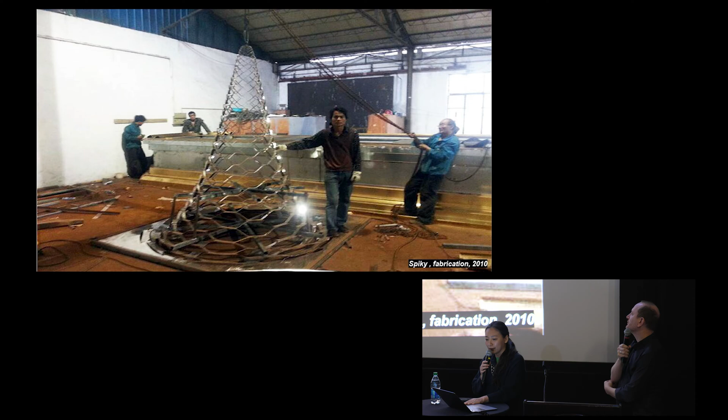For example, a piece of stainless steel can be water jet cut into thin stretches, so that when we pull them together—much like paper—they become three-dimensional and form an interesting pavilion. But they can also be squished down, flat-packed, and shipped to other places. So there's this sense of mobility and transformability that we're very interested in exploring in a real material sense.

Another concept that's been important to us from the beginning is that architecture doesn't have to be one-directional, just expressing its own intentionality outward. There's also the engagement of the user, the histories that are already there, the cultural perspective that's already there, and the experience every visitor brings to a place or object—what they carry with them before they encounter that object in the space—which is also part of the experience and part of the conceptualization of what that space is.

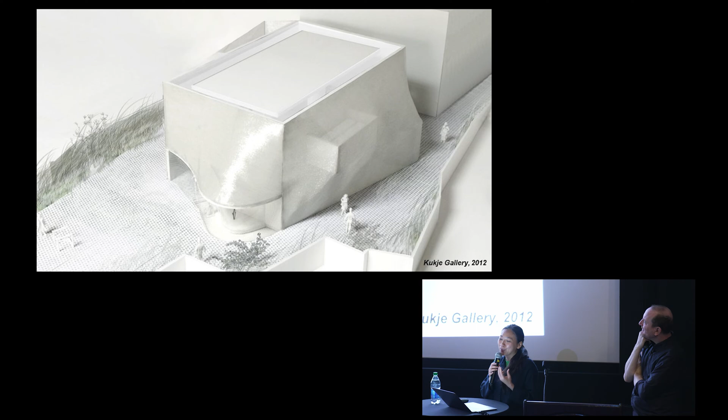This idea of interaction and perception is very interesting for us. How does that get experimented with in architectural terms? We often experiment with forms that are not strictly opaque or transparent, but somewhere in between, forms that are dynamic rather than static, and transformative. It's just one moment in a long series of times. The sense of engagement, in whatever form, is welcomed, as is breaking down what permanence can mean at small everyday scales, both in how things get constructed and fabricated.

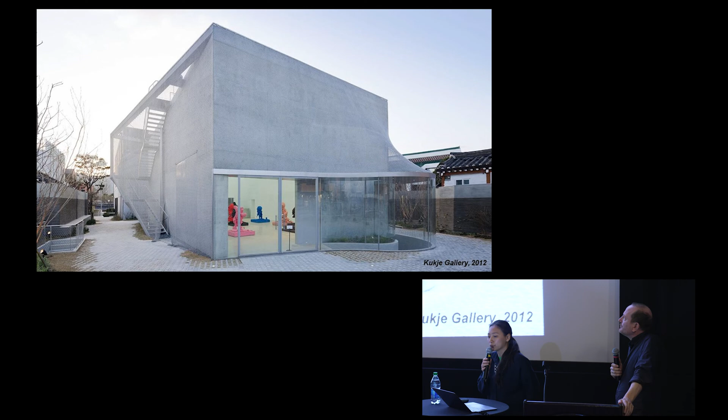For example, this was one of our earlier projects: a gallery building in Seoul, in one of the oldest neighborhoods, right across from the Imperial Palace. We knew from the clients that the neighborhood was upset about large contemporary art buildings moving into this historically sensitive context, because many of these buildings are abstract box-shaped modernist forms that clash with the refined, complex textures and geometries of the old Hanok homes surrounding the site.

What we proposed, which was immediately accepted by the Historical Society, was a bespoke handmade cloth that we wrapped the building with, letting accessory elements like the staircase to the roof or vestibules take on more playful, engaging forms around the big gallery box, cloaking it with this soft cloth. It's made of 500,000 stainless steel rings hand-welded together. As a result, the form doesn't seem drawn by a master or fixed permanently—it's always changing, with a soft, double-curved form that can only be made by hand.

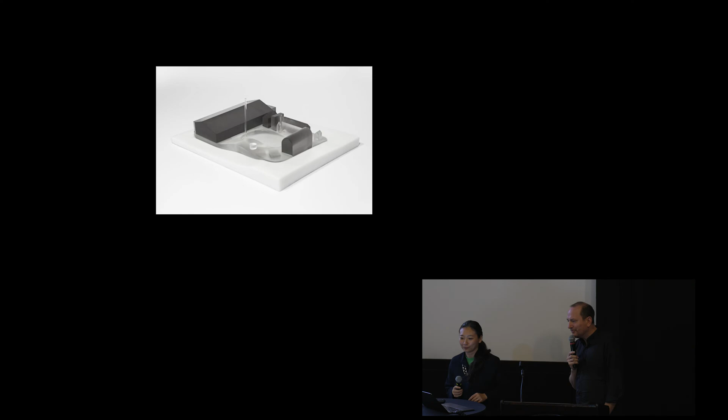Two of them are arts projects, and two are housing projects. As Jing mentioned, a lot of the early experiments around material, time, form, site, and labor informed these four projects. Jing and I, coming from a bunch of different places and having lived in many different places, are very much drawn to site—the history of a place, its particularity, really informs how we approach these projects.

There are four projects: two in the US and two elsewhere. This one is in northern France, in a very small town called Meisenthal. That sounds German—it's on the border between France and Germany. Sometimes it was actually part of Germany, sometimes part of France. Right now it's part of France, but they still prefer to speak German. It's a region where the European tradition of glassmaking emerged. There are other sites, obviously Venice, but this area is famous for its very ancient, early creation of glass. This town was the site of a glass factory.

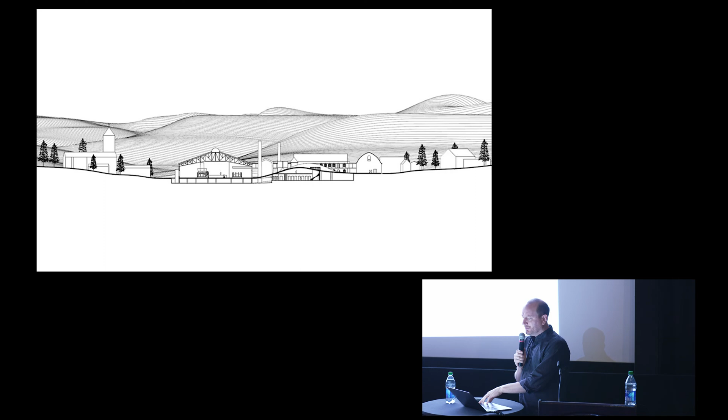We started to think about this ground as a molten ground, similar to the way we turn glass from liquid into solid. How can we think of this ground as something with a certain fluidity, using it as an organizational element that could bring these three disparate organizations together on a common ground?

So rather than making a building, we proposed more of a landscape intervention, to also bring back the factory yard as the center of the town.

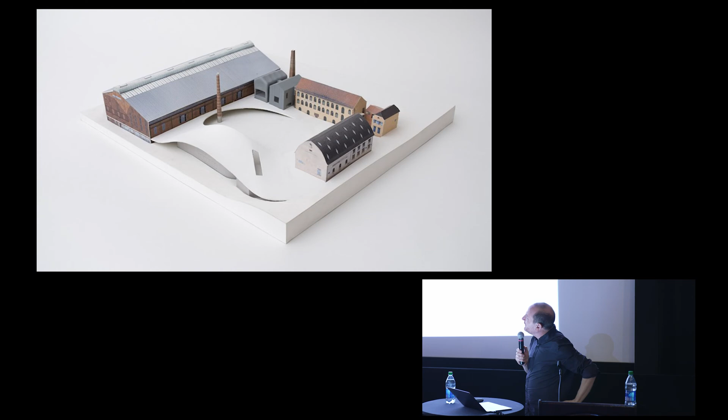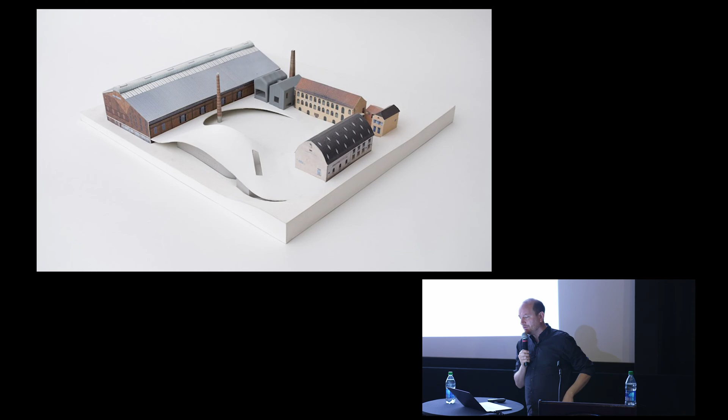We introduced this almost like a picnic blanket in French, a nappe, on which these buildings could sit as a common ground, then lifting it, creating over this ruin a new entrance. So the entrance to the site is now under this picnic blanket, into the old center courtyard, where the three different organizations share a common ground.

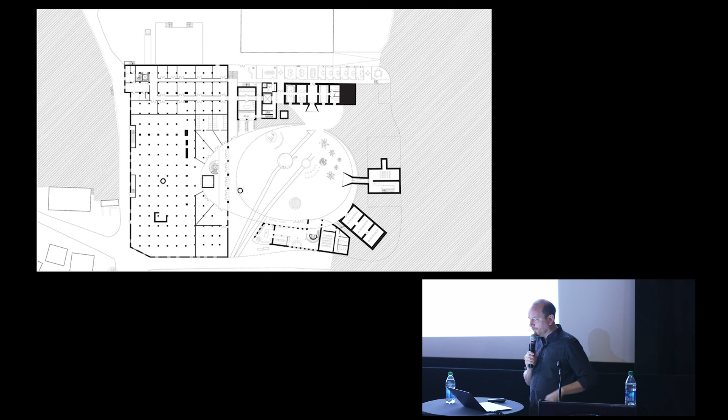We inserted a new black box theater in the hall with dressing rooms, so they could have 5,000 people concerts, and the whole logistics of the glass making had to be improved. We created a new entry underground to the museum, from where you go up through the old building, which is the only real landmarked building.

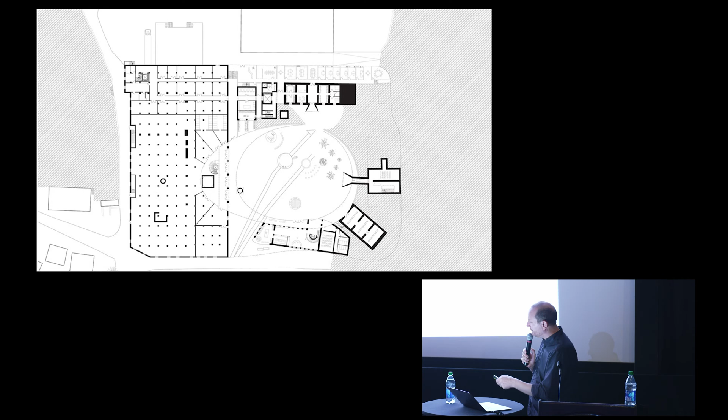And here the entrance, the shop, the cafe, sort of a small auditorium and education spaces. And here all the storage of the Christmas ornaments, this is filled with Christmas ornaments.

Quite fascinating, this was a project that took time. It was publicly funded, it needed to be phased. We worked in a very small community with a very small labor pool, so it took a number of years, and we went through different phases. We started with the renovation of these spaces, the glassmaking facility, then the black box theater, then the auditorium, and here we ended with the renovation of the museum.

So when you come there now, the intervention is really embedded in the fabric of the town itself. We've said maybe you shouldn't go and visit it yet, you should come in 50 years and see how it sits, how it's another layer of time that has nestled itself within this context, within this wide range of material palette. But it is certainly there, because it takes on a different expression, a different language, but in a way nestling itself within and up, under, and around everything that is there.

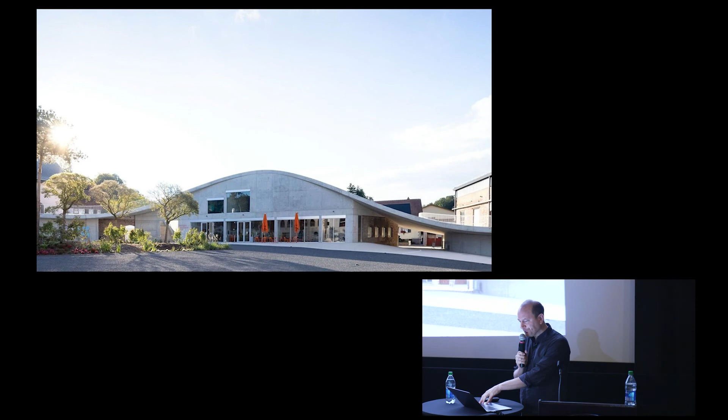Here the new entry into the center courtyard, poured in place concrete. And this is the new yard with the cafe, and above, the education center on the second level.

This summer we were there.

And this is a complicated one, this is the museum, so we will take you a little bit around the perimeter of the various buildings. This is a landmark building where we had to build a completely new subterranean support as the new entry to the museum, and then up.

As you see here, the ground actually brings all these different levels together. So sometimes you can be under this ground, sometimes you can be up, giving new perspectives and also a new view to the village and to the context.

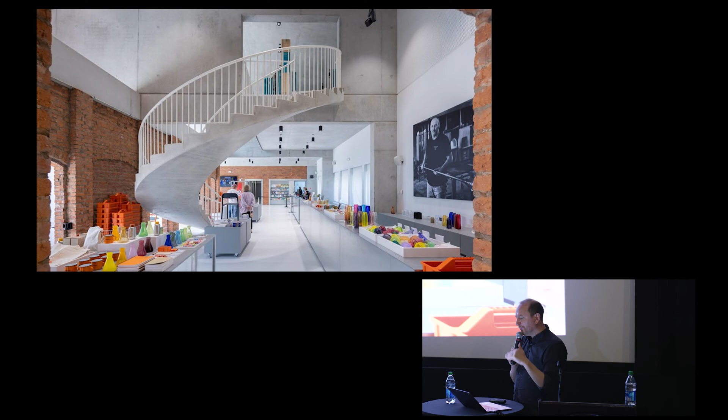We actually thought a lot about how the visitor would move between these layers, from above and below, and have this experience of going through these histories and through these layers of time, and how do they come together, the old and the new.

And then at that level, a bridge that connects you to the glassmaking studios where there are artists in residence, they work with active new production. It's a very important place in the region, and also in the international glass world with studios. So history continues, which is the theme for them.

The Black Box Theater, a large space with a large door, which on the inside can be used for a more intimate setting for 300 people with retractable risers, but then the back door can open up, and the stage can be reoriented for large concerts, where they do concerts for 5,000 people or more throughout the seasons. So time continues, history continues, and maybe the material can mold itself around these different histories.

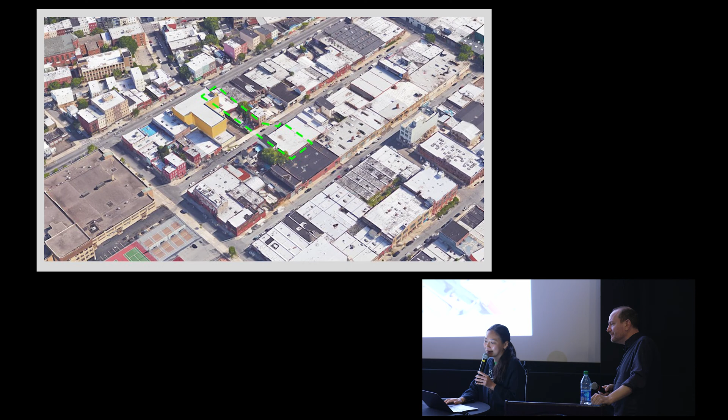And the context is a hodgepodge of mini storage, warehouses, artist studios, and quite non-pedestrian friendly and quite messy and loud, with a lot of trucks going back and forth, but also very vibrant and exciting in a city that has very little of this kind of neighborhood and areas left.

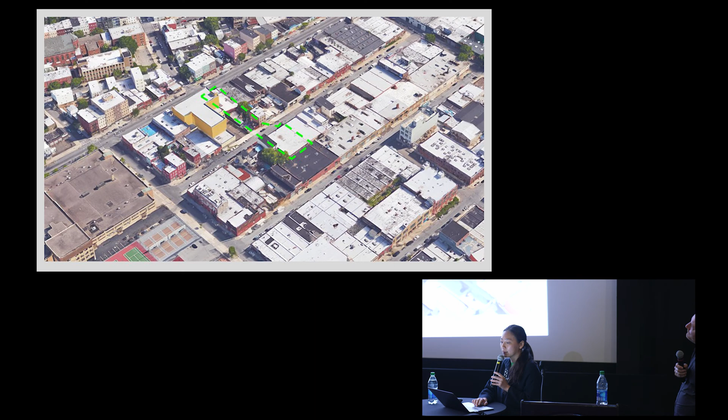We very much wanted to—so the program is an art institution that has artist residency, galleries, and performance space, and amenities that serve the visitors and the artists who work here. And the project spans over 2 blocks, with one building that's a renovation, and the 2 buildings which is this building.

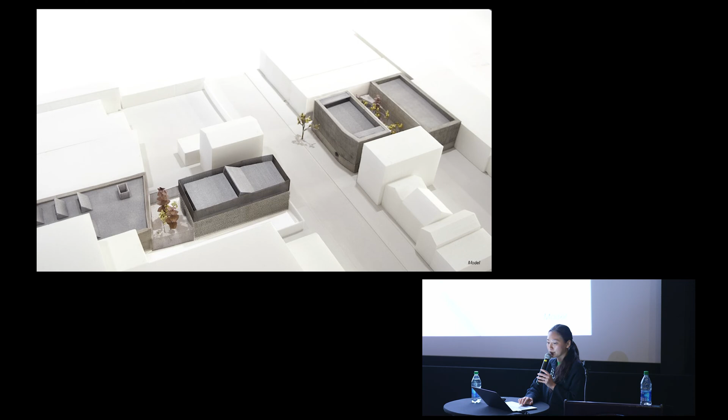So this was one of the lots where a renovation came about, and that's what this building is. In the yard of that old stone cutting shop, we inserted another gallery space. So this was converted into a gallery space, and then we inserted another double height gallery space here. And then across the street, artist residency and performing arts space.

What you can see in this model is that because of the context being quite rough and quite difficult, it's not a pedestrian-friendly neighborhood. We introduced these volumes to be quite robust, almost a kind of brutalist approach to these buildings and volumes, but still giving it a softness in the way that it pulls gently away from its neighboring buildings.

And allowing a porosity to permeate through the entire 2 blocks, so that visitors can enter from one side of the campus and walk through the buildings and alleyways, then cross the street and walk through the alleyways and end up in the sculpture garden. And all of this is publicly accessible.

But then we also put the most public programs, such as the bookshop, the cafe, and the garden in the center of the block, so that the buildings start to create a boundary and a buffer to the outside, creating this oasis in the middle of the block.

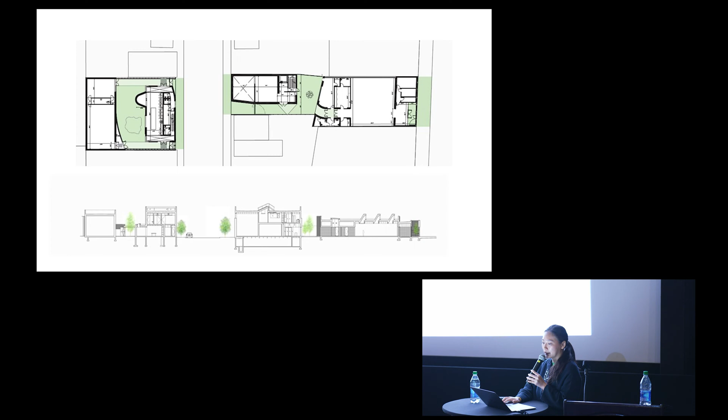And it's also very important for us that we use material as much as possible in the neighborhood. There are a lot of warehouses that house a lot of building materials in this neighborhood. So to just really be resourceful and almost source as much material within a 1 mile radius.

But still treating them with very different attention to detail, and also introducing different scales in the way that we change the textures and materialities on the facade. So really bringing a sense of human scale into these buildings was very important to us. Here you see the series of elevations of how we were carefully calibrating that material change on these buildings.

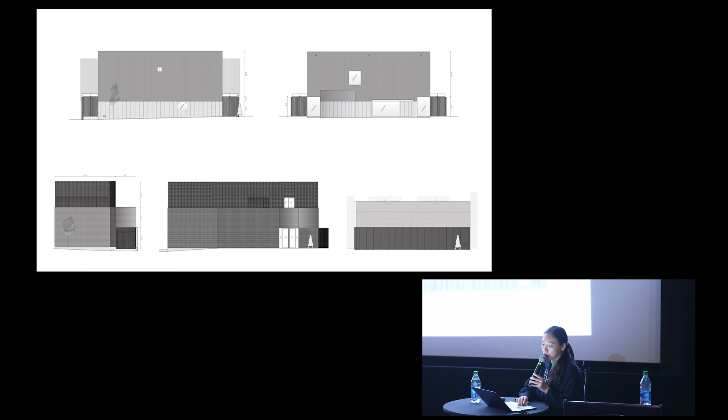For example, in the performing arts building that you see, the whole building is made out of concrete on the outside, but there is a material and pattern change halfway.

And one of our heroine, or very admired, architects that we always look at is Lina Bo Bardi, especially because of her love of urban context and also love of the craft and working with people.

You will see a lot of pictures of her just being on the site, working with the craftsmen and welders and bricklayers day in and day out, and figuring out the details on the site when she was working on these public institutional buildings. So we were very keen in most of our buildings to also introduce the expression of the hand, something that's not made out of standardized elements.

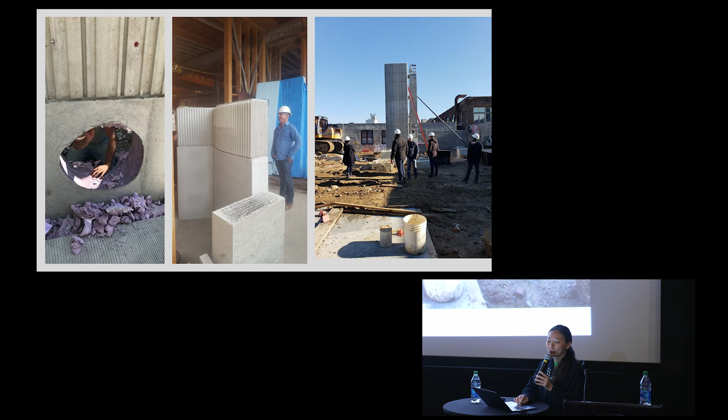So, for example, here we have a nod to Lina Bo Bardi making these potato windows on this concrete, kind of somewhat brutal buildings.

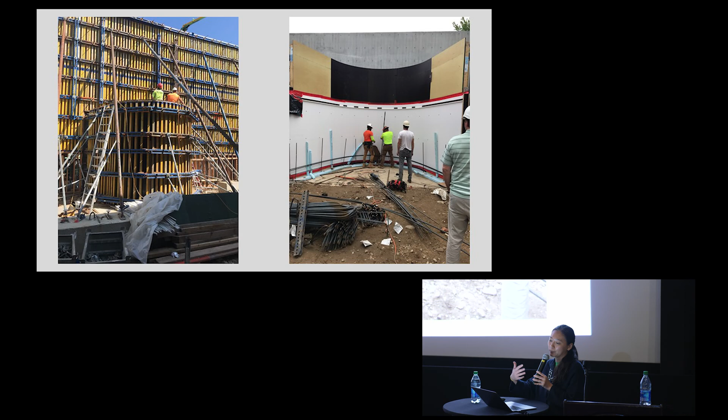And then in this kind of box buildings we also introduced this gentle, almost a kind of protrusion that's soft and playful. That is the seating area for the artist, but on the outside it also became a sculptural moment in the sculpture garden. And that also allowed a different scale to exist in the garden, one that is much more intimate.

So here you see the potato windows that started to also have an eye on the streets and have that engagement of the passerby, although there are not so many people walking here, but still in those rare moments to increase that interaction from the outside to the inside.

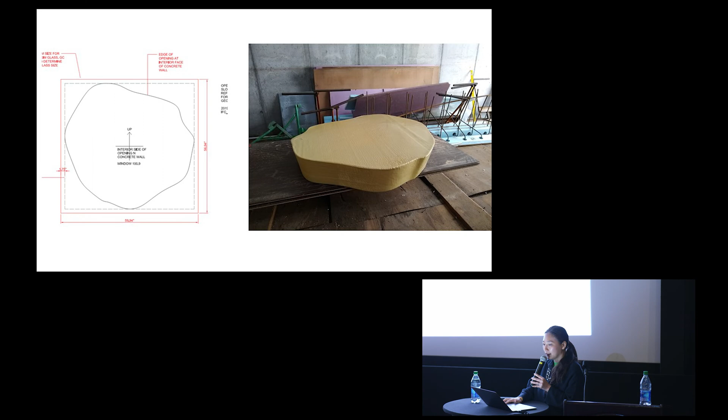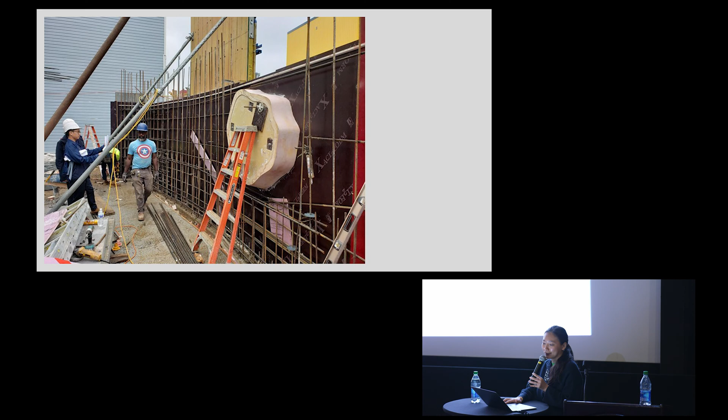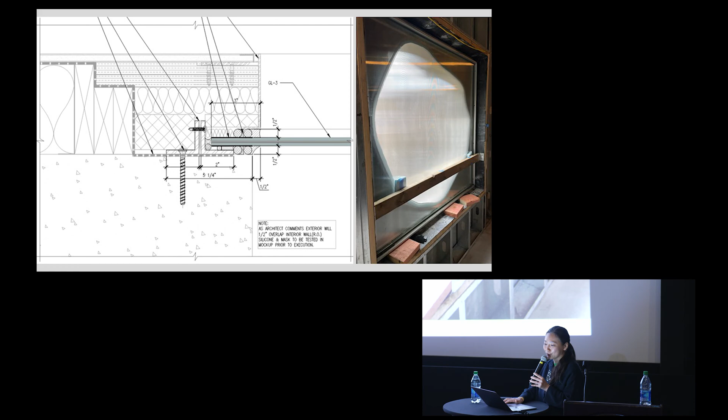Many of these geometries are not prescriptive—they were serendipitously drawn, cut out with foams, and then became encased in a permanent material like concrete. They also required quite handmade details to enclose.

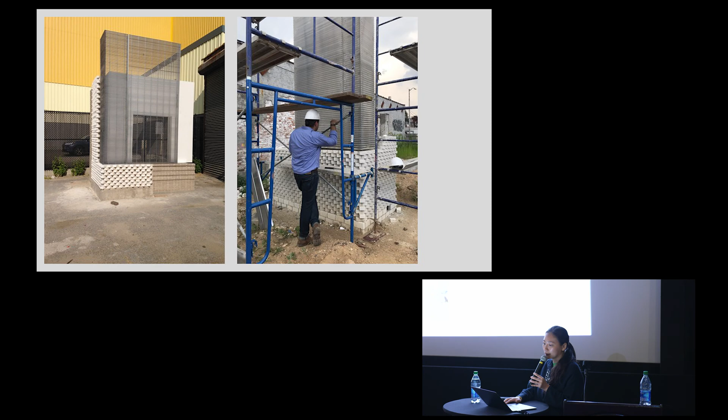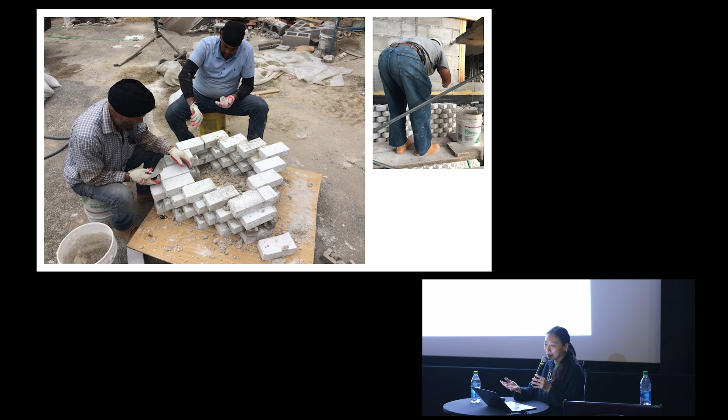This is another building, the gallery building, where we used two different materials: anodized aluminum and gypsum brick. We really thought about the way the brick is laid out, working with Harry, with whom we've worked on many projects in the city. This is Harry, there on the left, figuring out an interesting way of laying out the brick.

I introduced Aldo to Harry many years ago, and ever since he's been really interested in collaborating with us.

We rotated the brick 45 degrees, which allowed the corner to not be sharp and to be seamless. So when you go around the corner, the way the pattern reflects and diffuses light is very soft, which was a really nice effect.

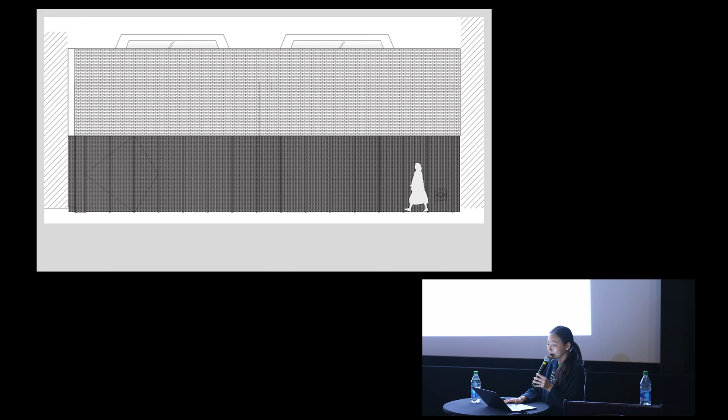This is the renovation building, where we clad the old warehouse or manufacturing building with standard brick, but rotated to use the backside, which is typically unseen. The coursing or spacing between the bricks matches the sides of the course, so when laid out you don't see the unit anymore—it becomes almost a seamless pattern over the entire facade.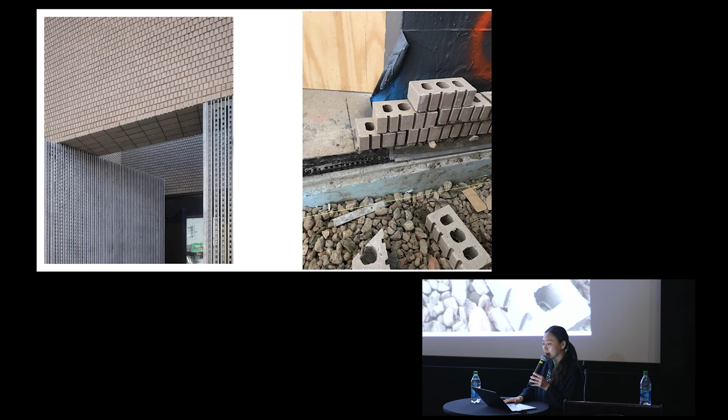At the bottom, there's a gate and wall that wraps around the building, made out of Unistrut, a material that's ubiquitous but usually hidden behind ceilings. We brought it forward as the first material you see, making it the hero of the story.

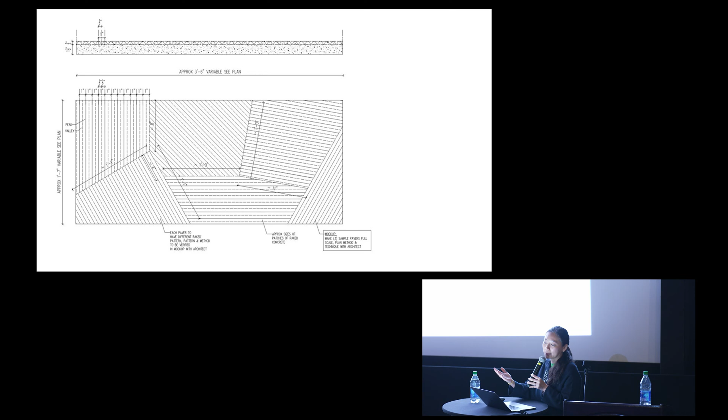The space between the buildings and the alleyways is poured sidewalk concrete, but we made custom raking tools and worked with the contractors to create this kind of sand, almost Japanese sand garden pattern in the concrete.

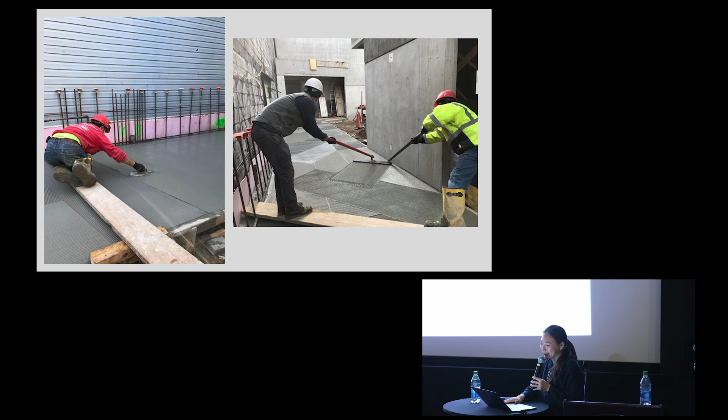The contractors were very nervous about being given the liberty to do whatever they wanted—they asked, 'Are you sure you just want us to...' But we didn't give them total liberty. We were there to dance together with them; it wasn't something completely prescriptive from the beginning. So there's a pattern that unified all the walkways between the buildings.

From the top, you almost don't see the buildings, but when you're walking around them, there's a very clear intentionality that people find and think, 'oh, this is different'—although many of the materials are very common and not precious at all.

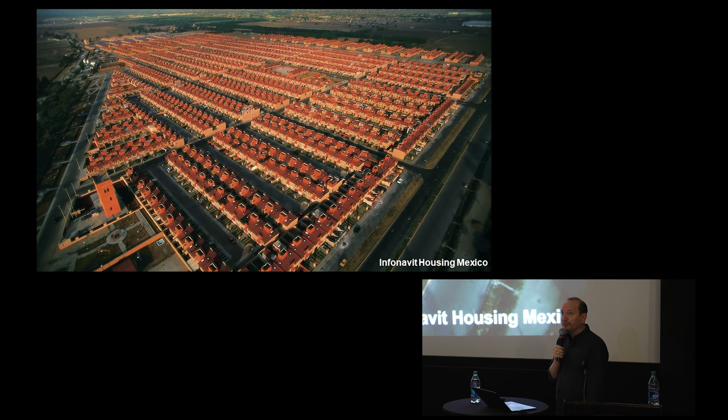But it means that a lot of these neighborhoods are built really far from city centers. Although they maybe start very crisp, they very quickly turn into areas that are very hard to service by these rapidly expanding cities. They can't get there with public transportation, schools, trash pickup, security, etc. anymore. So there's actually a lot of foreclosure and empty homes.

The city of León is one of the fastest growing cities in Mexico, partly because a lot of the car manufacturing that used to be in Detroit moved to León. So it's attracting a lot of migrant labor that end up working in the factories. There's a Honda factory at the outskirts of León. The city is growing very rapidly, and there's a lot of self-built homes around these factories.

The mayor had a real ambition to be a sustainable and compact city. It's one of the cities with a very good bus system and bike paths, but if your city keeps growing at the perimeter and you can't service all your new citizens anymore, something needed to change.

So we were asked to work with them on a housing prototype, but one at the price point for this demographic, so to say, and it meant it needed to be extremely cost efficient. Now, the most efficient way to build housing is with a double-loaded corridor, as compact as possible, but that's also the most dreadful experience one can have between street and home.

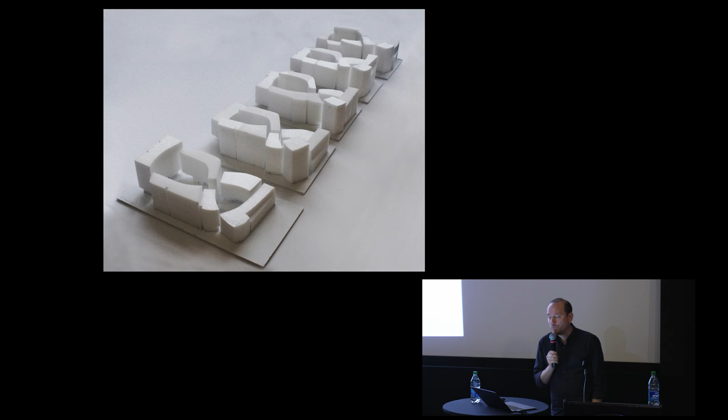That's a nice ambition, but it's hard to think through how you could do that at a very economic price point. We worked together with IMUVI, which is the local housing authority.

Really intense collaboration from concept all the way till the end. We did the concept, SD and DD. They did the CDs, but a lot of this was really just designed on WhatsApp and through text. And very quickly they came

to our studio in Brooklyn. We worked on a number of these studies. It's a corner lot, so we wanted something that would make people feel proud and have a clear identity at the corner, but also sort of breaking it down in smaller pieces.

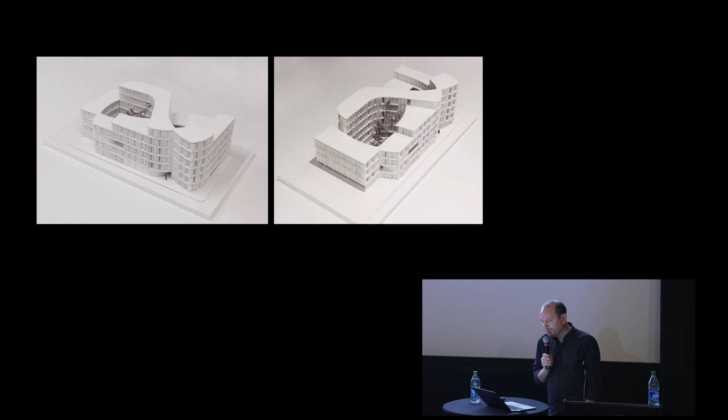So these are various studies trying to create 56 units distributed around these two courtyards, but with different massing throughout. This is the model that came out of some of these workshops. You see two courtyards, one larger one smaller one, and a rising up to 6 floors.

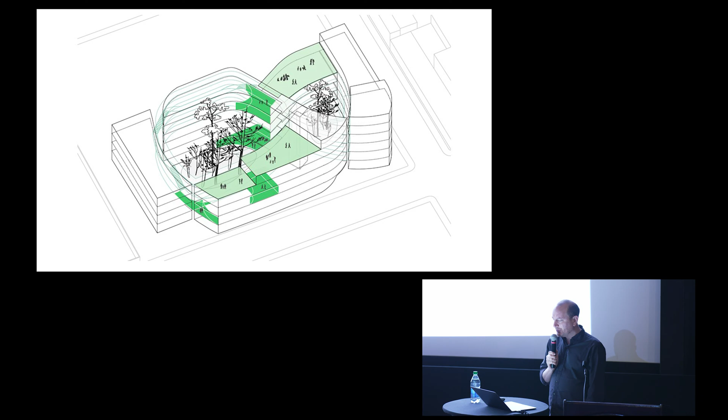All walkable up. What was also important is that we left a few units out, and those units would be spaces for the community that they could share, where people could get together and have the social life that otherwise would happen on the street.

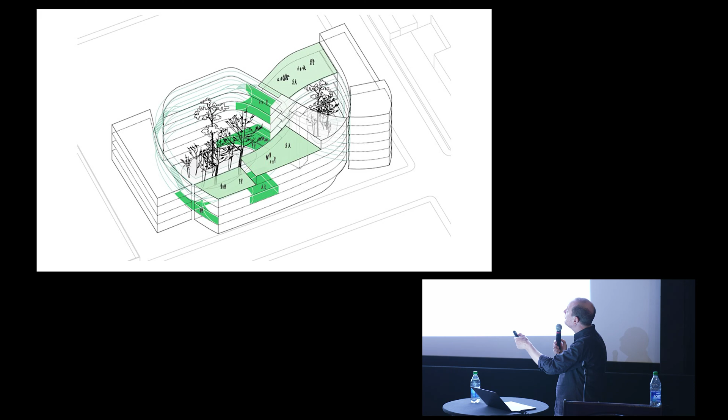And having a staircase, not just a regular scissor stair, but a straight stair, but also a secondary stair that actually wraps around and moves up through the building, connecting these various collective spaces.

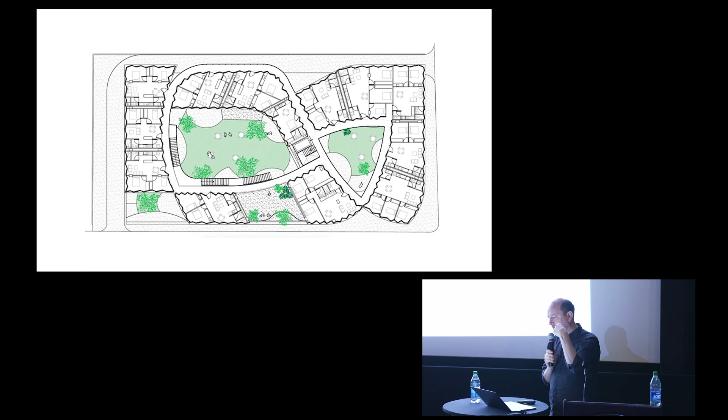If you have a single loaded corridor, it means you can have cross ventilation. It means you don't necessarily need air conditioning, and with the courtyards you get a sort of stack effect, so there's always a natural breeze that allows you to open your windows, yet you have people walking past your corridor. So how do you deal with that?

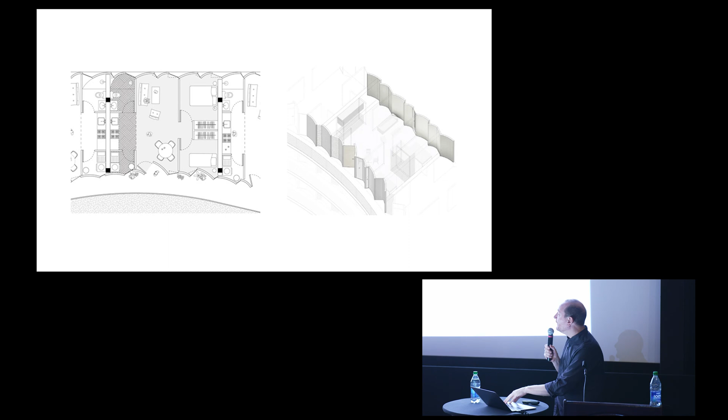We wanted to have windows not directly facing the corridor, but on the oblique, so that people wouldn't be staring straight into your house. So we designed a very simple system of precast concrete panels, two panels and two window frames, that could be freely installed to produce this somewhat articulated, non-flat corridor.

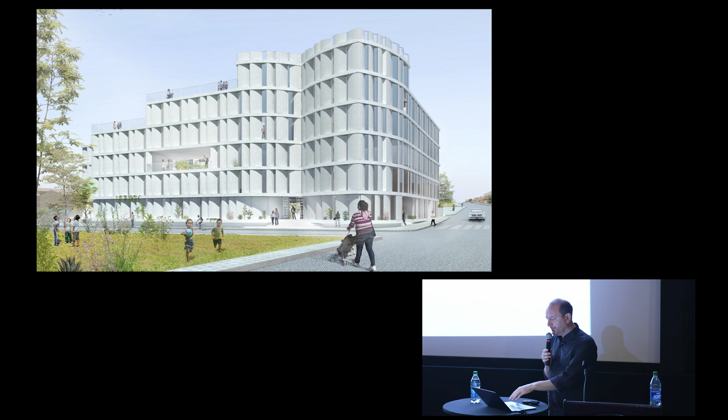We did a mock-up here on the right. I said, wait, you cast it standing up? And they said, yeah, we didn't really know how to do it, and it was really, really hard. But we were very good at that over there on the left, so maybe we can rethink it.

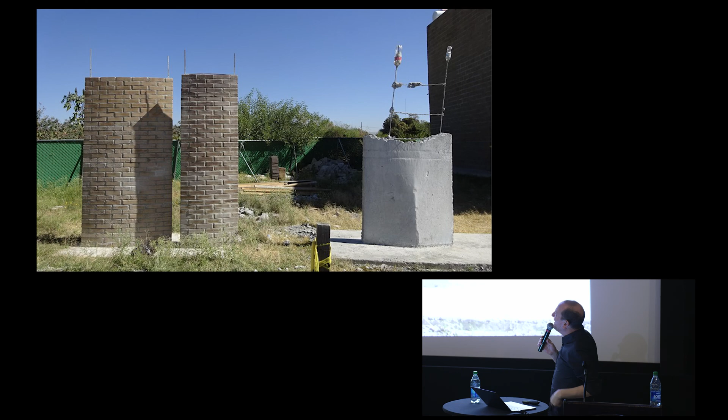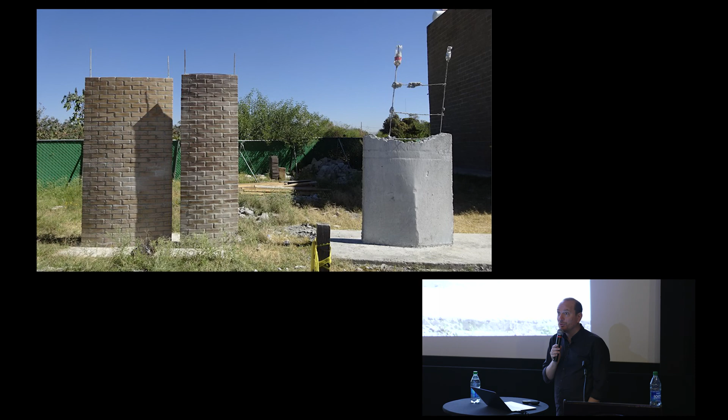It turned out there was only one precaster in Guadalajara, six hours' drive away—no competition. You'd have to install it with a big crane. They said for installation of one precast panel, we could instead work with 30 people locally for 30 days. So can we not rethink this?

We said, okay, that makes sense—it makes much more sense to work with the local community on something everybody can contribute to and work with. So we wanted to keep the articulation of these panels, but think through a different way in which this could be built.

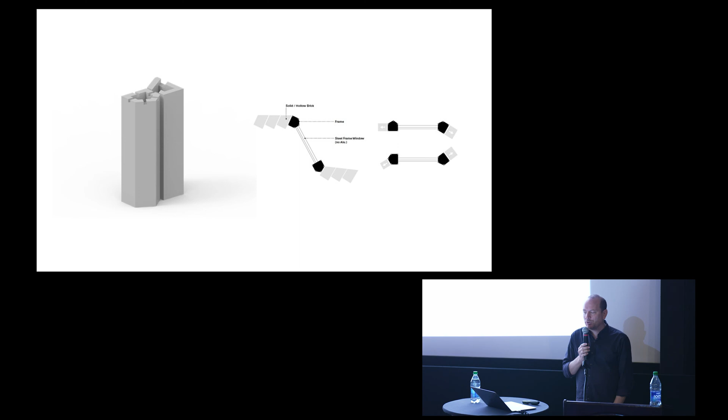We learned that the maximum an individual worker can carry is 17 kilos. So we designed a block—basically this panel built out of two types of block. One is a straight one, forming the base of the panel, and then one that is the hinge point, a corner block that doesn't have any similar angles.

All these angles are unique; they don't repeat, which means at any moment they can become the hinge within the system. And since the window frame always needs to be at 90 degrees, it allows you to insert it wherever you need a window—that's how the wall around these curvilinear floor plans was made without too much drawing, more as an instruction of how to put it together.

So this stacking forms these panels. This was their mock-up, much more exciting. Again the hand becomes visible, and you start seeing this idea of light and shadow created through the fluted pattern—here it is being installed.

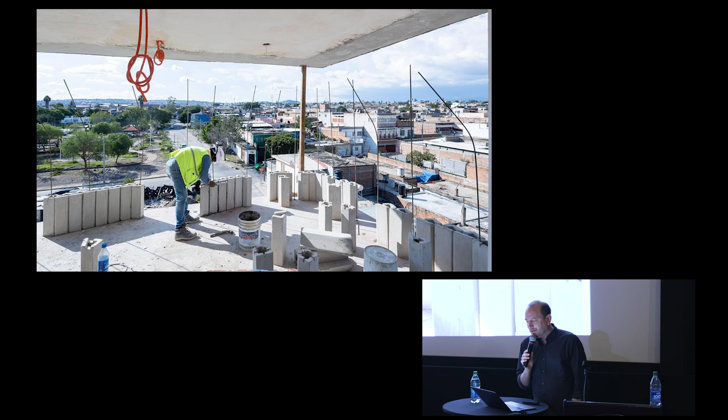Not with drawings necessarily, but with a very simple set of instructions—an offset from the edge of the slab. As soon as you hit that point, you insert one of those connecting pieces, put in a window frame, and start again. That gave us a very varied texture along the wall.

It's very easy to do construction administration like this too, because you just look at videos on WhatsApp. And there it was—that's how we were able to realize this.

The construction cost of this project was $2.5 million—two very simple window types and some block.

This opened during COVID. We were able to go and meet the first families to move in.

The city offers this program and actually provides the mortgage. They interview everybody who comes to live here and act as the mortgage provider, but none of these people necessarily have paperwork, bank accounts, or any financial history—so that was really done through interviews.

They had to put the community together and see how a community of 56 households would work—you can say, yeah, my IKEA furniture doesn't fit in the corner, but...

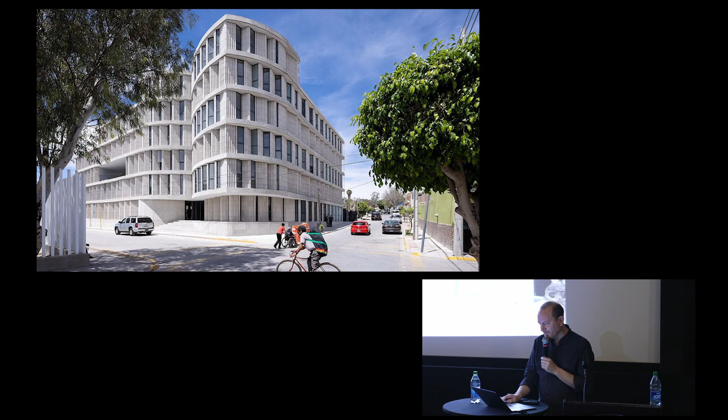We also imagine that this building will, and we haven't been back yet, eventually be painted and taken over, really embraced by the new inhabitants and occupied. The great thing is that the inner wall is the outer wall, and that was certainly one of the ways we were able to be so cost effective—here at the corner with the entry.

And you see sort of its context in this sprawling city. I continue, right, with this one?

The double-loaded corridor has been an issue for us to think about, so we were trying to see if we could also address this in New York City with a project we just recently finished. Especially with COVID, we realized that people were quite happy on the street, and very happy in their units, but the journey between the street and their unit was where people felt very uncomfortable. You could see through different images from the news how simple things—a window, a balcony, and the way you think about the relationship between your home and its context—can have such a big impact on your experience of what it means to be in the city.

In New York, also after or during COVID, there was obviously a lot of civic street life happening with Black Lives Matter, and at the same time a lot of people left the city. So when we think about housing and what sort of urban housing we would like to make, it's important that you calibrate the way in which the home is like an escape from the city, but also, more importantly, how do you remain really connected to the city and to civic life.

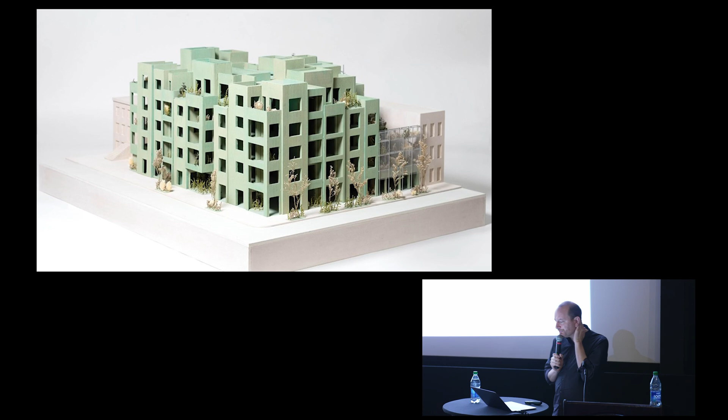This project is one of three we're doing with a young development team called Tank House, of which one is an architect who used to work at Foster's for 15 years, and the other is the son of Thom Mayne. So they do not only read spreadsheets but also plans, and they understood that architecture can actually add value if you use it in the right way.

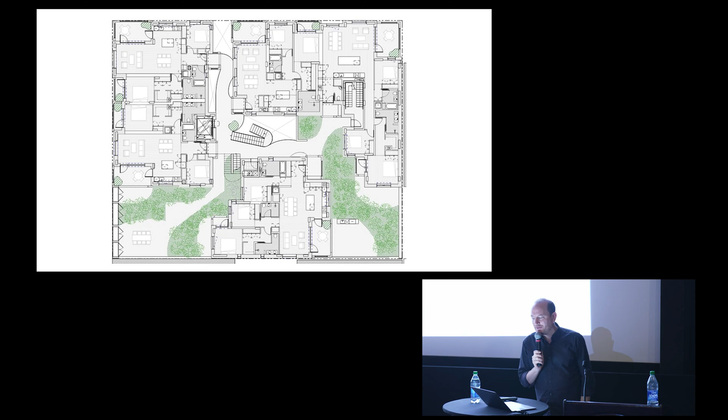Obviously commercial real estate is very prescribed in what works and what doesn't, and many decisions are made based on ratios and Excel sheets, not so much on the plans. But what we try to do here is in some way maximize the exterior space, the exteriority of the unit, giving units windows in 3 and sometimes 4 directions, opening it up, building extra balcony spaces—possibly cheaper space, more exterior space—but creating a stronger sense of community and connectivity to the city context. The building has 18 units.

I'll go back. It's basically 3 floors that are similar, with 5 units per floor, then 3 larger units on top, 2 commercial units on this side, an entry, a community room, and parking on the ground floor. We didn't do a basement—it's close to the Gowanus Canal, so it didn't make sense to go underground.

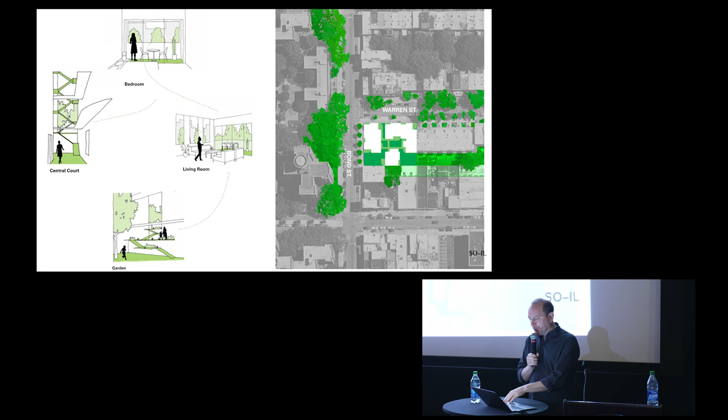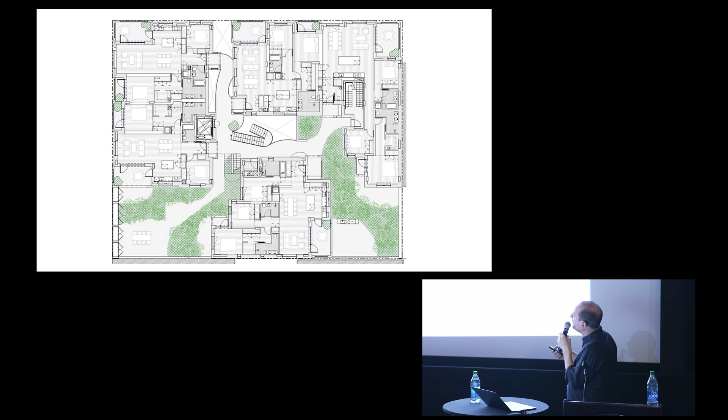So it's a quite simple mix, but we organized it as 3 separate buildings, if you want—one here, one here, one here—with an inner court that otherwise would have been the double-loaded corridor, now an open walkway over these 5 floors. An extra balcony means every unit has at least 2 and sometimes 3 exterior spaces, one of them within this open courtyard, a sort of stoop or porch. One of the qualities is this in-between space between inside and outside.

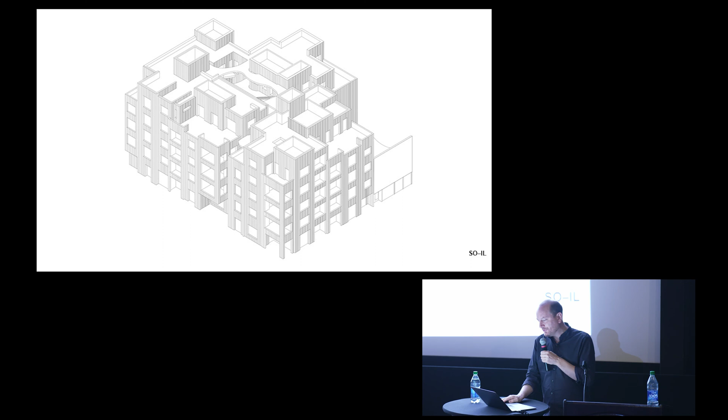From the outside, the building looks pretty hermetic, and from above it's very strong and robust. But in the center, you see this open, porous, sinuous, and more soft courtyard. This also just opened last year.

We worked again with a simple CMU block with a slight green tint and also a slight rotation. Again, the masons in the beginning don't like it, but at some point they do, and they see how beautiful it can be—really balconies as rooms that can be used and part of the life of the unit, with 2 doors, one to the kitchen and one to the living room. So they're really more like exterior rooms rather than balconies, part of the unit and of the articulation of the building, of the facade.

And so you enter here on the more quiet street, but you don't come into a lobby.

You stay sort of in this covered area, and this is maybe a view or a typology you could recognize in other places, but for New York City it's very rare to have this sort of very exterior entry sequence. There's a little glass vestibule in front of the elevator for the mailbox and packages, but basically we stimulate people taking the stairs as you come into this space, which are these walkways that are not necessarily aligned and then enmeshed again with a stainless steel mesh. Because these walkways are not necessarily on top of one another, it gives a much more rich and articulated language.